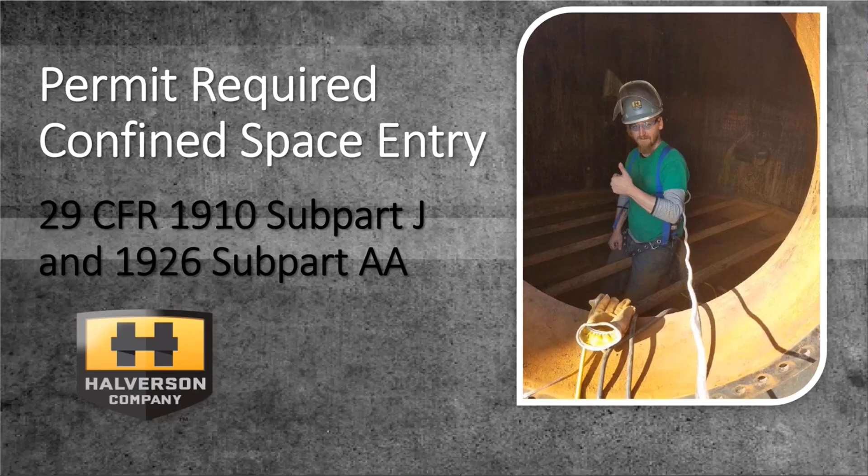As part of our confined space training, we're going to go over what is a confined space, the permit versus the non-permit confined space, hazards and symptoms associated with working in confined spaces, and the workers' roles. There's also a little bit on employers' requirements we might need to touch on. So first of all, let's talk about what is a confined space.

Okay, so here's what a confined space is. It needs to be big enough so you can get your body in it. It needs to have a limited or restricted means for entry or exit. They call it egress. So that means it's not a regular door, it's something that's kind of hard to get into. So like a manhole, that would be restricted means.

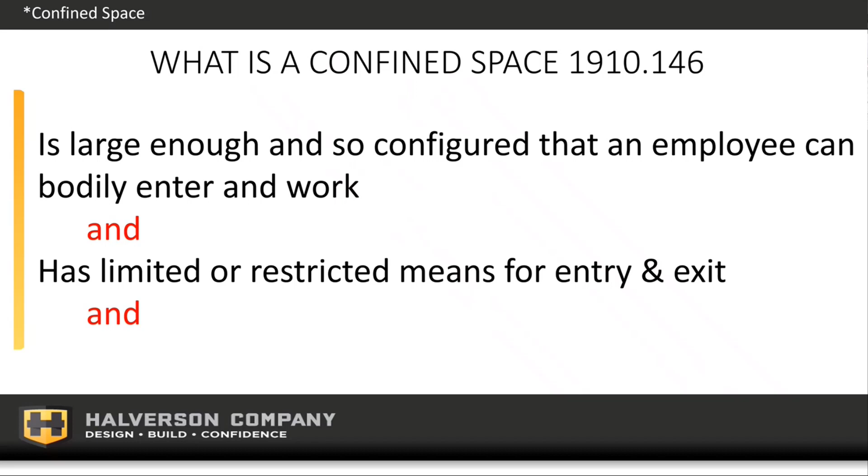If you're getting into your attic, oftentimes you go through a little attic door. You have to get out a step ladder, go up and climb up through into your attic. That would be restricted means for entry. Some of the bins that we go in have pretty big entries on them, so they do not have restricted entry. The other thing that makes a confined space is it's not designed for continuous human occupancy.

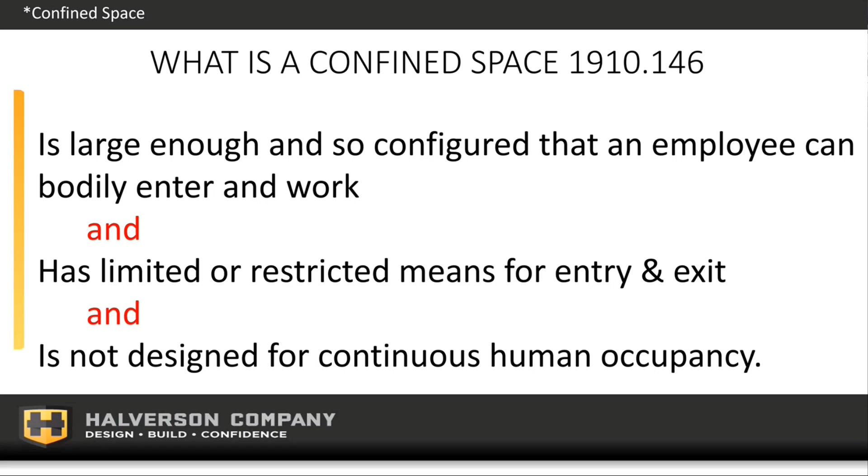That means, is it a place you go to live? Can you live or work in that place normally? So maybe I've got a little cramped office that I work in, and I might think that it's a confined space. So you look at it and say, is it large enough to get into? Yes. Does it have a restricted means for entry and exit? No, there's a regular doorway. Is it designed for continuous human occupancy? Yes, it's meant for you to be in there. So that's the three things that make up a confined space.

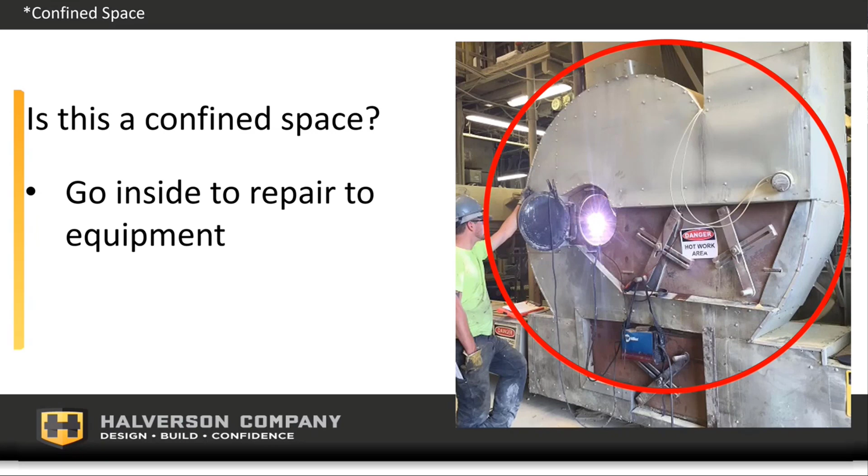So now let's talk about this. Does anybody recognize where this is? Yeah, Balchem. And you know what's going on there? Yeah, they're replacing liners inside. Right. There is actually a guy inside there. You can see the bright light coming out of that little access door. So they're in there welding. We had to go inside to repair it, to put some new lining on it. We're welding metal plates to the existing walls.

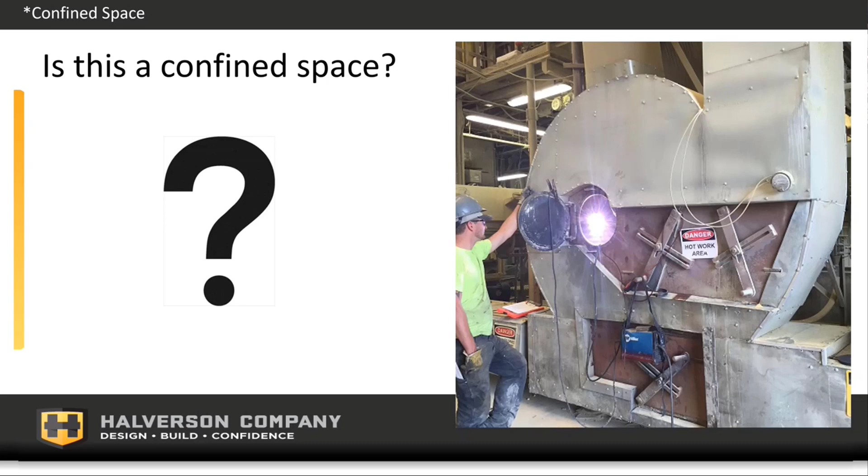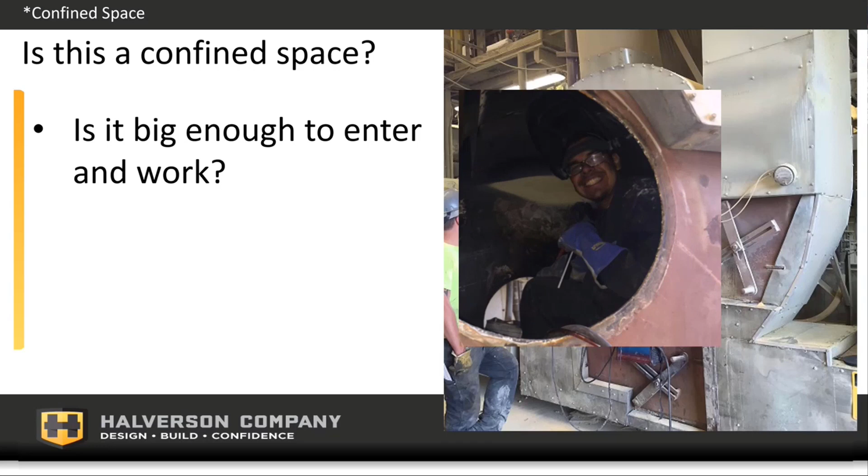So first of all, is that a confined space? What do you think, Miguel? Yeah, definitely. So let's think about our things. Is it big enough to get your body in there? Well, there he is. Just barely. You recognize who that is? That's Angel. So Angel's in there welding that. So yeah, it's big enough to get your body into it.

At least for some of us. I might not be able to get into that. But shut up, Robert.

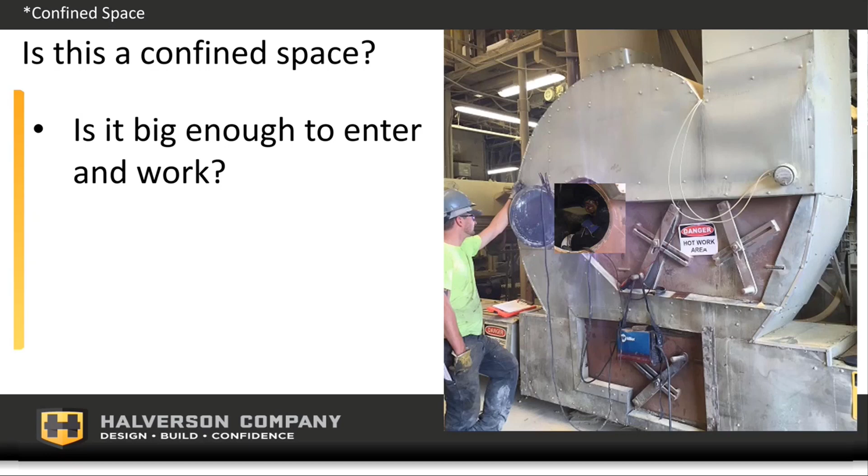Okay, has it got a restricted opening for entry? Yeah, that's not a regular doorway, right? That's not a regular opening. That's pretty restricted to get into. Anytime there's a little hatch like that, yes, it's restricted. Yes, it's a confined space.

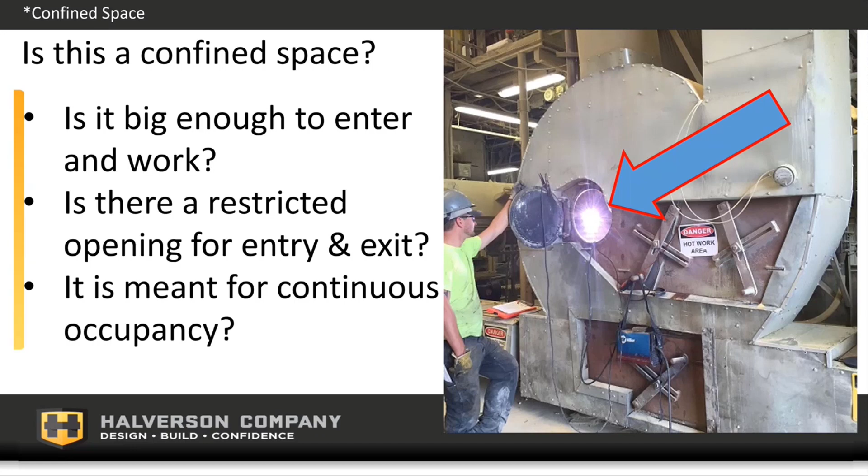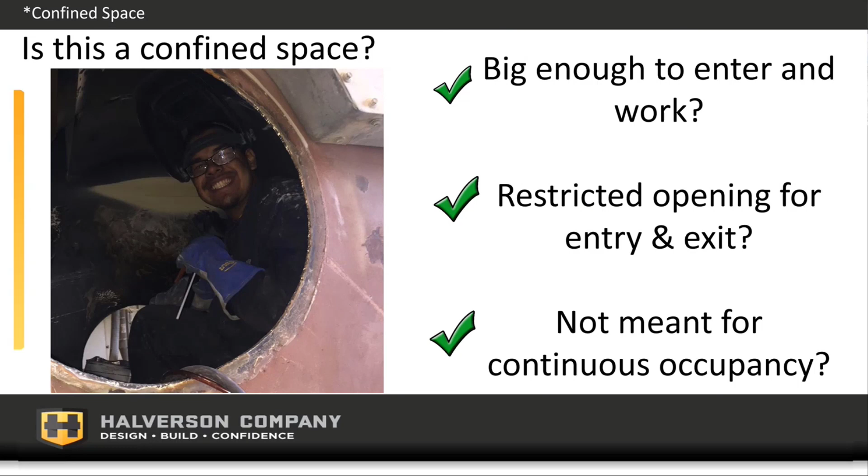And then, are you meant to work in this type of an environment? Is it meant for people to be in there? No, it's not meant for people. It's meant for product. So because it meets all three of those, it's big enough to enter and work, it has a restricted opening, and it's not meant for continuous human occupancy, that's a confined space. Okay. That kind of just really quickly tells you what is a confined space.

How about this, what we've got on the screen right there? Is this hopper a confined space? So let's look at it. Is it big enough to get in? You can see the outline of the man on the left, and you can see, you know, kind of the shadow of him inside. So yeah, obviously you could get a person inside there. Does it have a restricted opening?

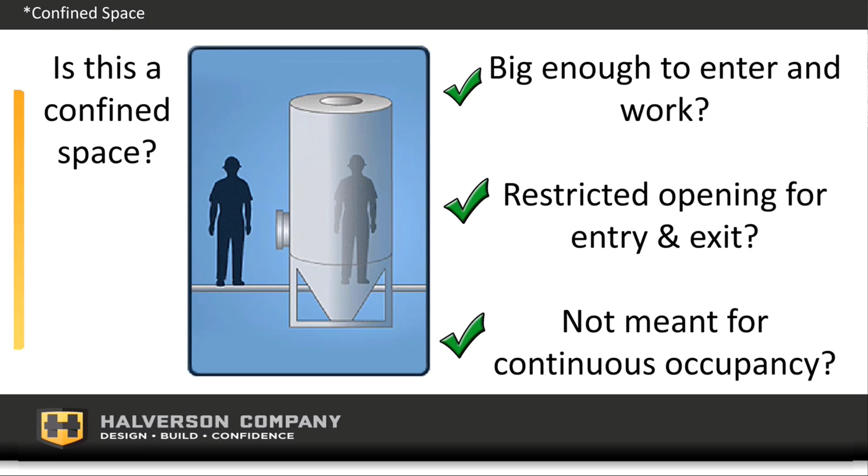You have to get in through that little manhole. That's pretty restricted. Is that meant for people to be in? Or is that meant for product? Product. Yep, just product, right? So it's big enough to get in, has a restricted opening, and it is not meant for people. So, yep, that's a confined space.

Let's do one more really quick. Okay, this is one I use a lot just because I think it helps drive home what a confined space is. This is a crawl space underneath a house. You can get into it, obviously, it's big enough to enter and work. It's not a regular door that you're coming in through, it's a restricted opening. And it's not meant for where you're supposed to live.

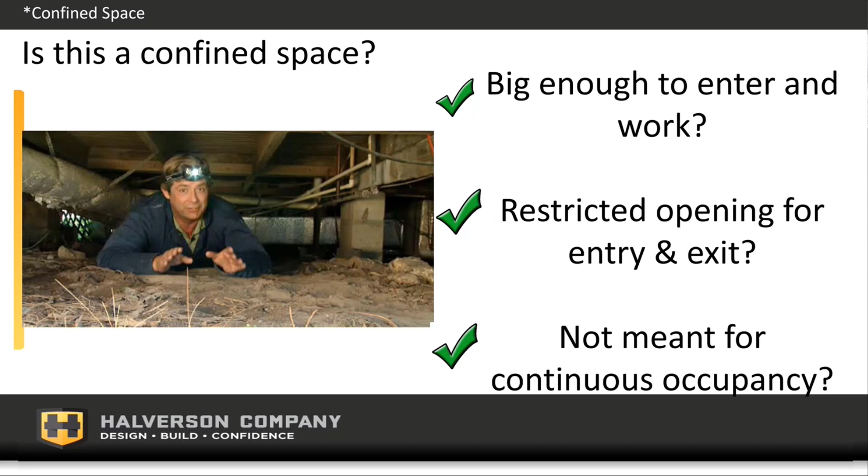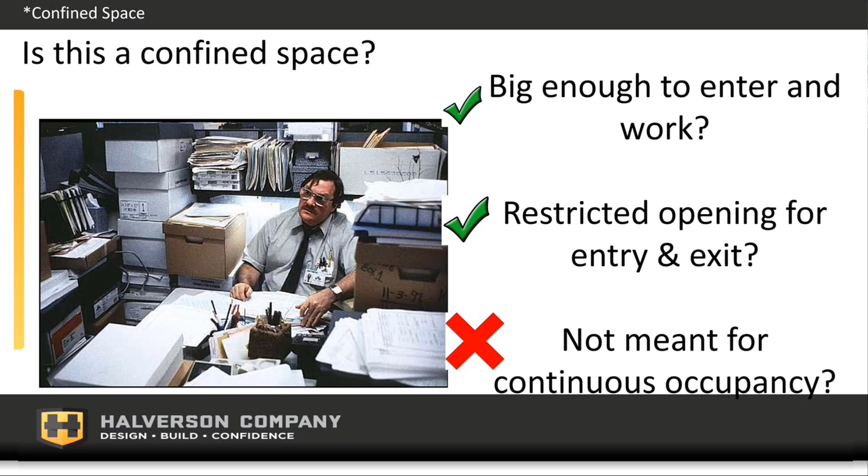That's where you're supposed to have your pipes and things. There aren't supposed to be people in there very often. So your crawl space under your home is probably a confined space. Big enough to enter and work, yes. Restricted opening, kind of, because it's, you know, all choked up with boxes. Meant for human occupancy, it is actually meant for people, so it doesn't meet that criteria.

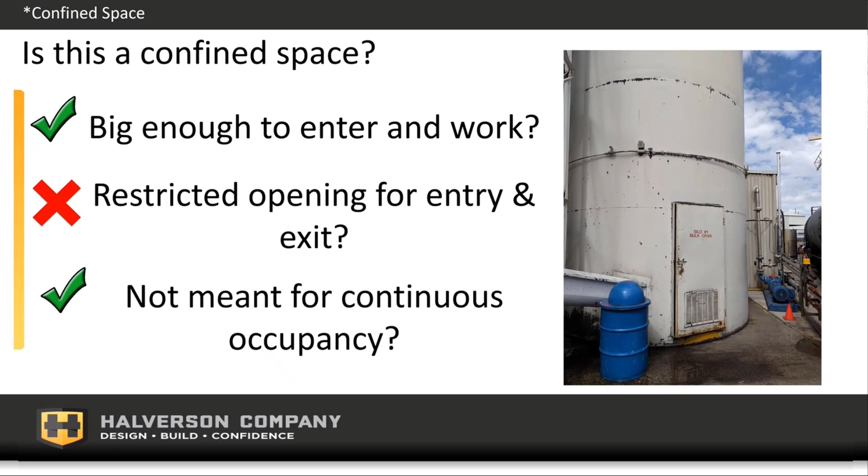Okay, I'm going to kind of slip through this really quick. This one, not a confined space because of the door. It's easy to get in. It's got easy entrance, easy exit, right?

Okay, so now that we know what a confined space is, let's talk really quick about a permit required confined space. So let's talk about your crawl space underneath your house or your attic in your house. It may be a confined space, but there's probably not a lot of inherent hazards with it. If there are hazards that OSHA has identified, and we'll go over those in a second, then at that point, we need to make sure that we get a permit before we go in there.

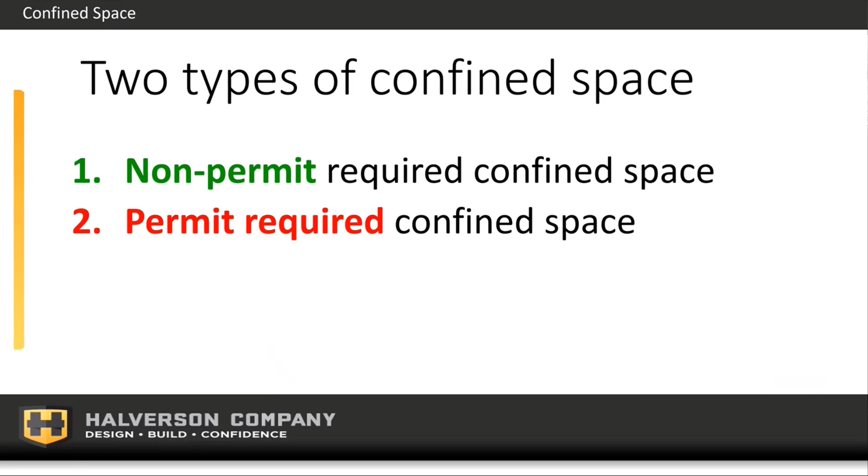So to go into my attic, I'm probably going to be just fine. I don't need a permit to go into my attic. But to go into a hopper on the job site, I'm going to need a permit for that. That's the difference between a confined space and a permit required confined space. So let's talk about that. Different areas that might be confined spaces that need a permit.

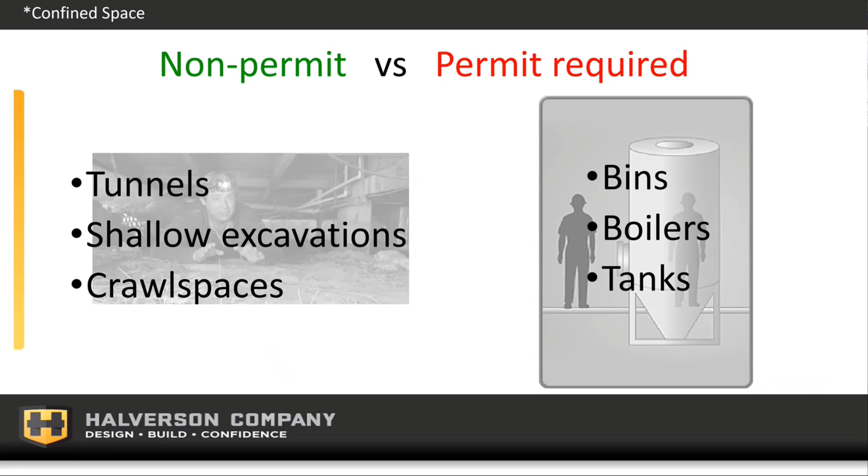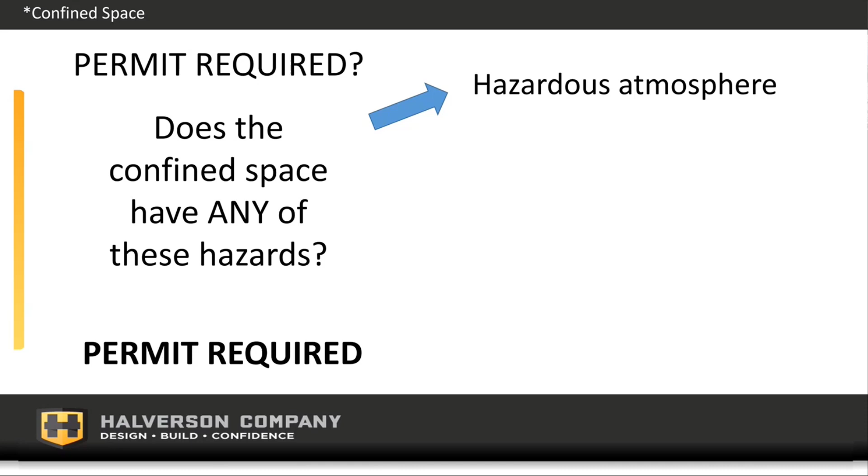So things like tunnels, shallow excavations, crawl spaces, attics, those typically do not need a permit. The ones that typically will need a permit are things like bins, boilers, tanks. So if it is going to need a permit, it's going to meet this criteria here. Any one of these things is going to say, yeah, let's make sure we have a permit for this. So if it has the potential for a hazardous atmosphere, if it has the potential to engulf.

Okay, Robert, what is the potential to engulf? What does that mean? Like a full grain bin. Yeah, you step into a full grain bin on top and you sink into it. Or if you're inside something and it has potential for some product to fall on top of you.

Perfect. Here's another one. Inward converging walls or floors that slope downward. A lot of times we have to go into bins or hoppers and do repair where the floor slopes downward. Automatically, that is a confined space that needs a permit. And then the last one would be any other serious safety hazard.

So let's talk about a hazardous atmosphere. There's a lot of things that we could classify as a hazardous atmosphere, but what we're talking about here is inside a confined space where this hazardous atmosphere is there, and that's the air that we have to breathe.

So I like this photo that I've got here because it just kind of shows that, you know, sometimes we don't think about ventilation as well as we could. Now, if you're inside a confined space, you might not have the ability to do that as easily. The one on the left there talks about oxygen. What's important about oxygen? I mean, obviously that's what we breathe, but how is a confined space affected by oxygen?

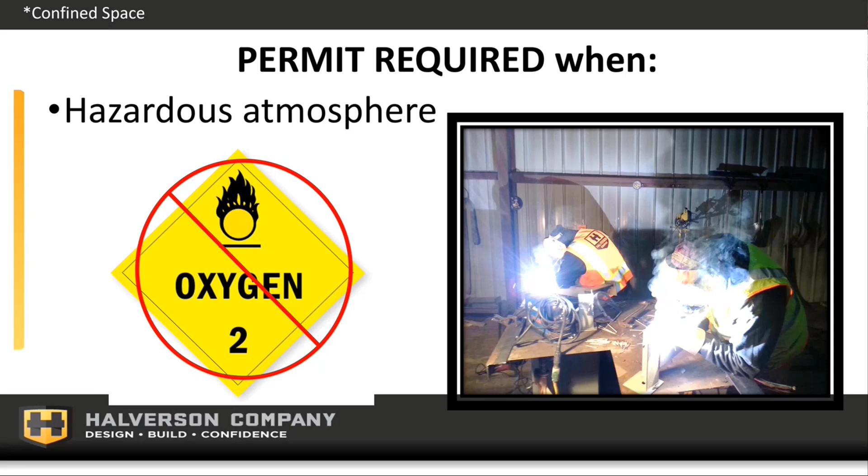Kind of an awkward question, huh? It's the lack of oxygen, I guess, is what I'm trying to say. If you're doing something in that confined space, maybe there's something else in there that's pushing the oxygen out. This is kind of one of the big killers that happens with confined spaces. People end up getting asphyxiated because there's not enough oxygen for them. And typically it's because something else inside that confined space has pushed the oxygen out of there. So there's not enough oxygen to breathe when you get in there.

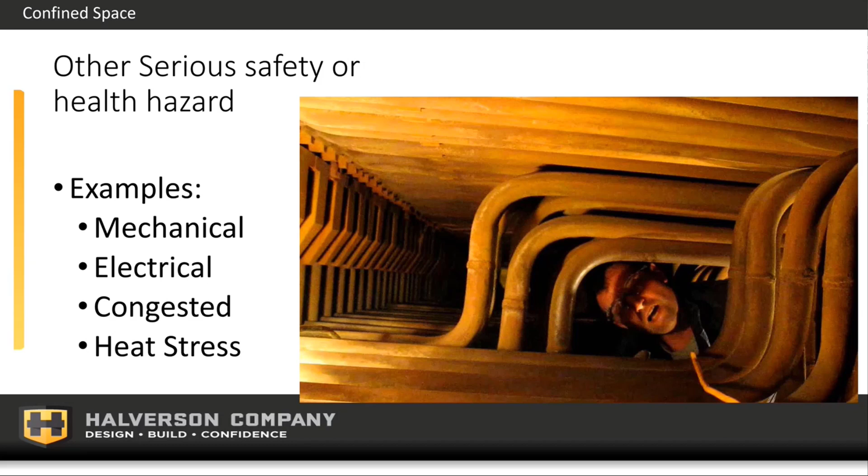Potential to engulf, Robert went over that. Inward converging walls or floor that slopes downward. This is simple, guys. If it looks like that, that's a permit required confined space. And then other serious safety or health hazards. People ask me what that could be. It could be something like this. How would you like to be crawling around in that? That to me is a pretty serious health hazard. Could be things like mechanical, electrical, congested, heat stress.

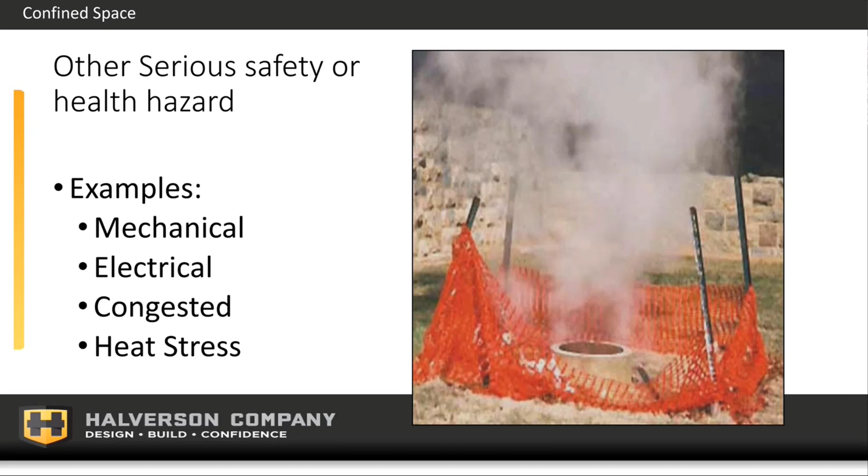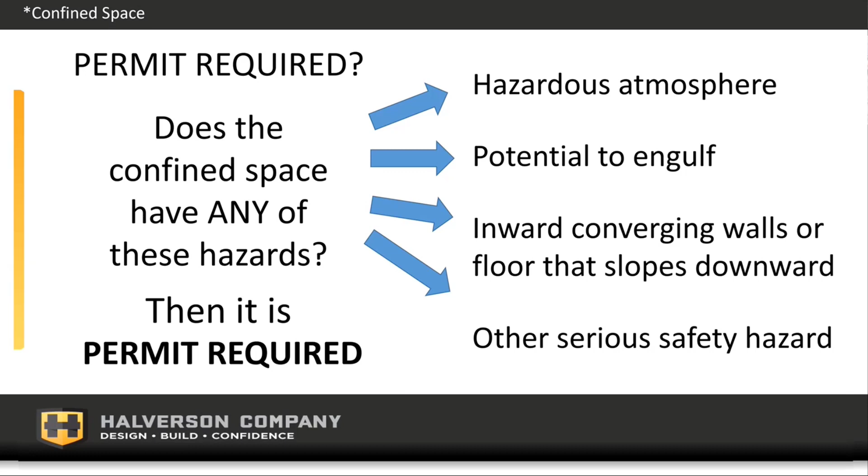Here's an example of heat stress. Look at that stuff coming out of there. I don't want to go down in that confined space. So that one definitely is permit required. I don't like that barricade around that very much either. Okay, so if it's permit required, again, it has to have a hazardous atmosphere or potential for one, potential to engulf, those sloped floors, or another serious safety hazard. Any of those are going to make it permit required. So on our job sites, you're going to run across a lot of permit required confined spaces. First thing you're going to do is get that permit.

Yes. Maybe even silicone. You know, if you're doing a lot of silicone inside a confined space, that can start to get kind of strong too, right? So what do you do in that situation? We use a mask. You can use a mask, respirator. Then remember, that's PPE, and that's definitely an option. Remember, that's always our last option. Try to get a fan in there. Yeah, exactly. Let's get some ventilation. Perfect. Thank you. That's what we did on this one.

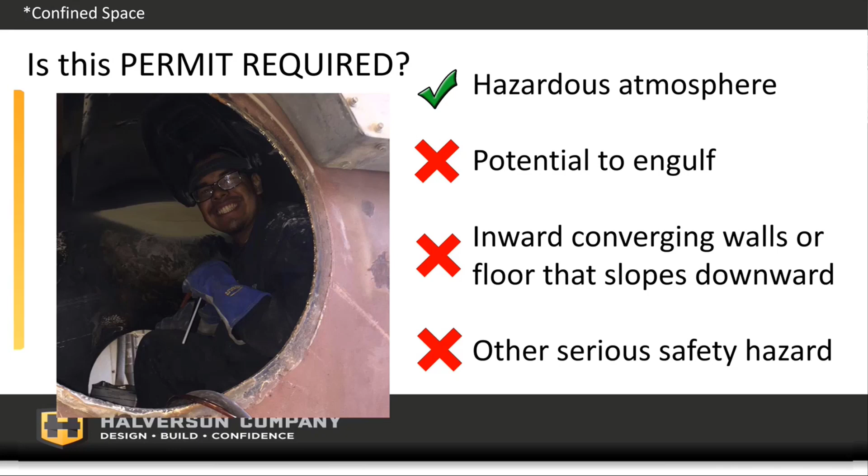There's actually two openings on this piece of machinery. There's one similar to this opening on the other side. And so we put a box fan on that other side, and there was always air continuously blowing through there for Angel. Okay. Was there a potential to engulf? There wasn't. There was no material that could come in from the top, and besides, everything was locked out. It did not have inward converging walls or a floor that slopes downward. What he was sitting on was pretty good. And there was not necessarily another serious safety hazard. But because of that potential for hazardous atmosphere, we still call this a permit required confined space.

Oh man, I had a spider in my bedroom the other day that I swear it was 2 inches big. I was scared to step on it for the mess that it would make.

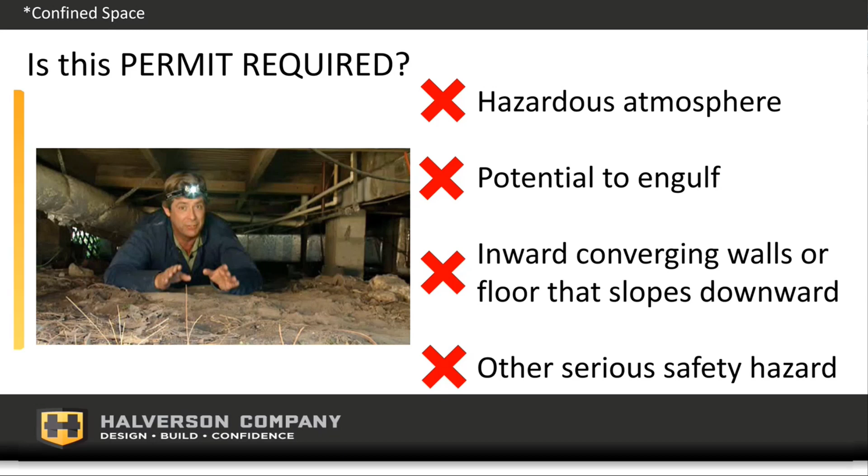Okay, so this confined space is probably not a permit required confined space because it doesn't have any of these potential hazards. So we wouldn't have to pull a permit to go in there. You know, it's good to be aware of what the hazards might be. Like Robert said, you might have some snakes or something in there, so it'd be good to be aware of that. Definitely could bump your head. It'd be good to have a bump cap or something, but it's not required that you fill out a permit.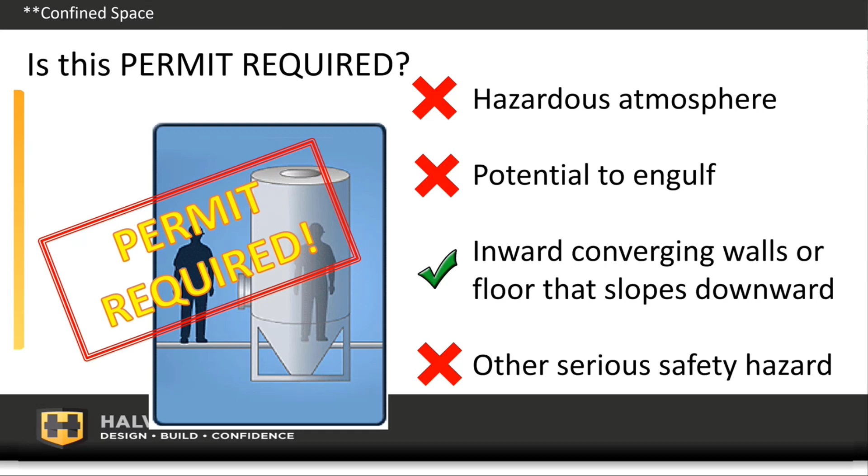So this is a Halverson policy that I wanted to talk about: if we are doing a confined space entry, our Halverson policy is that we need 3 Halverson employees. Why don't we use one of the employees from the facility and 2 of our guys? Why do we try to have 3 of our own guys? Training, right? Yeah, thank you, Frank. That's perfect. That's exactly right.

So for one thing, we're trained in construction. A lot of the facilities we go to, they're not trained in construction. There are a few different rules for construction than for general industry. And the other one is we don't know what trainings they've had. Do you know if the guy from the facility is trained to be an entrant? What roles can he do? And what kind of training did he have? Do you feel comfortable with that? So because of that, we just try to, whenever possible, have 3 Halverson employees when we're doing a confined space entry.

Now, that means, again, for estimators, you need to be aware that you're going to have to send 3 guys to a job that might only need 2. Well, if you're doing confined space entry, we need to send 1 more. Okay, that also means for foremen, supervisors, make sure you're thinking ahead so that you know what day you're planning on doing this and that you have sufficient crew there to take care of it.

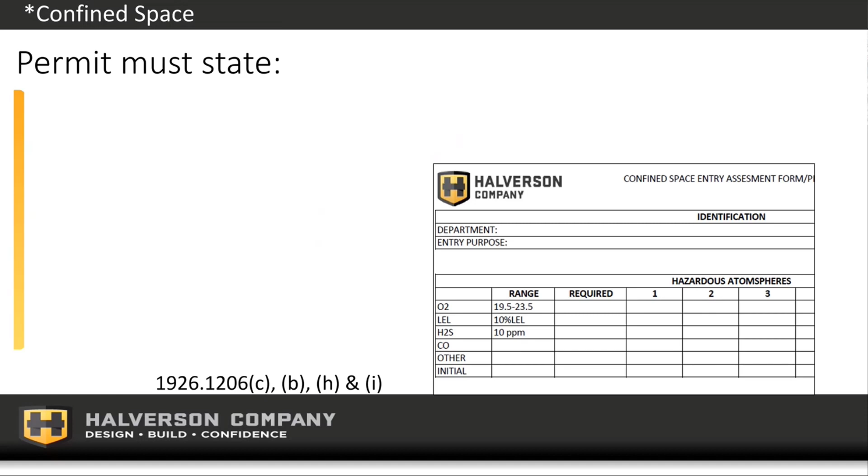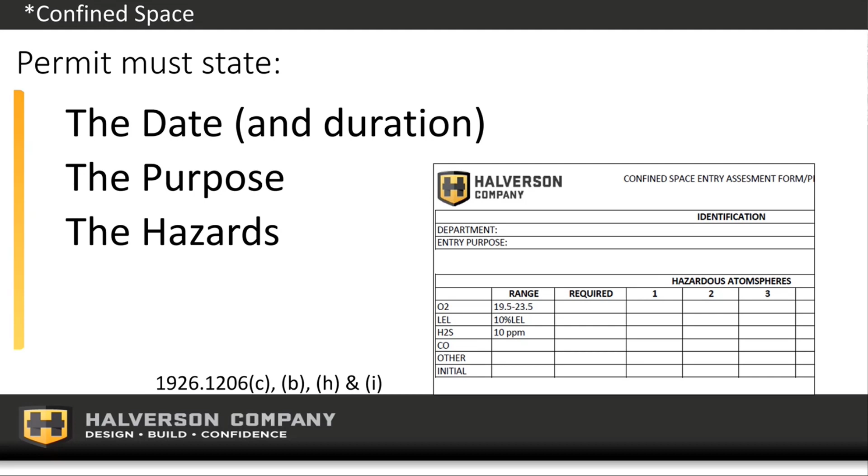Okay, fill out your permits. Your permits need to have certain things on them. They need to have the date. We try to determine what the duration is of our entry, the reason we're going in, where we're going in, what the hazards are that are going to be there. We want to identify the roles and duties. What that means is who's going to be the attendant, who's going to be the hole watch. The attendant sometimes is called the hole watch. Who's going to be the entrants, the people going in and doing the work, and who's going to be the supervisor. So we need to have that all written down on the permit.

And this is important to know. Let's say that Tristan is an attendant on a job and he needs to take off and go do something. Can he just go to Dan Lee and say, hey, Dan Lee, take over as attendant for me? Now, if Dan Lee's name is on the permit also as an attendant, then he might do that, right? As long as they're both authorized attendants, then they can swap for each other. But if their names aren't both on there, then they can't. So that's what an authorized attendant means, is that your name is on the form as one of the people who is an attendant. Okay, so let's talk about that roles and duties.

So we got a job where we're going to list on the permit attendants Frank, Larry, and Rayford. We're going to list the entrants as Frank and Larry, and we're going to list the supervisor as Rayford. Now, we only need one person in the hole at a time. So do we need two entrants? Are Frank and Larry both going to be entrants? Or are they both going to be attendants? Or how does this work? How come I've got them all listed there? How can I have Frank, Larry, and Rayford be an attendant and Frank and Larry also be an entrant?

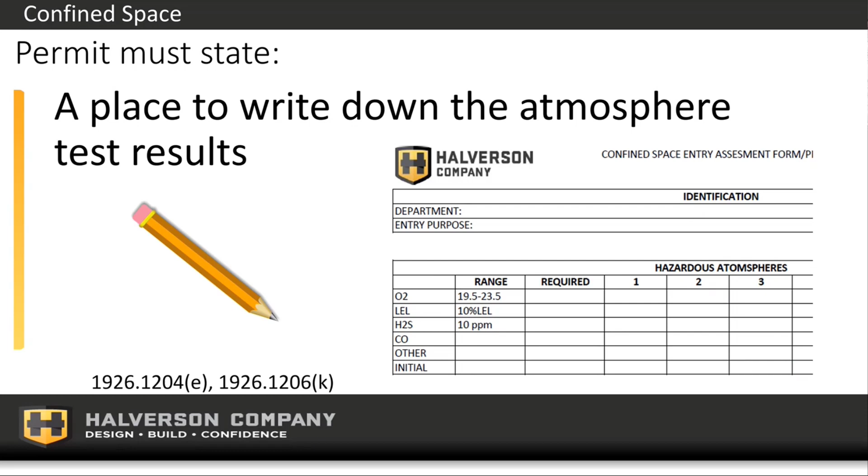Okay, on the permit, speaking of atmospheres, we're going to write down the atmosphere, what it is. We're going to make sure we check it before we go in there. We want to make sure that we're looking for at least 19.5% oxygen. That's the main one, the low end there. This is right from the OSHA regulations, stating your oxygen level has to be between 19.5 and 23.5. Where the biggest problem comes in, though, is if you get below 19.5. You start getting some symptoms that we might go over here in a second.

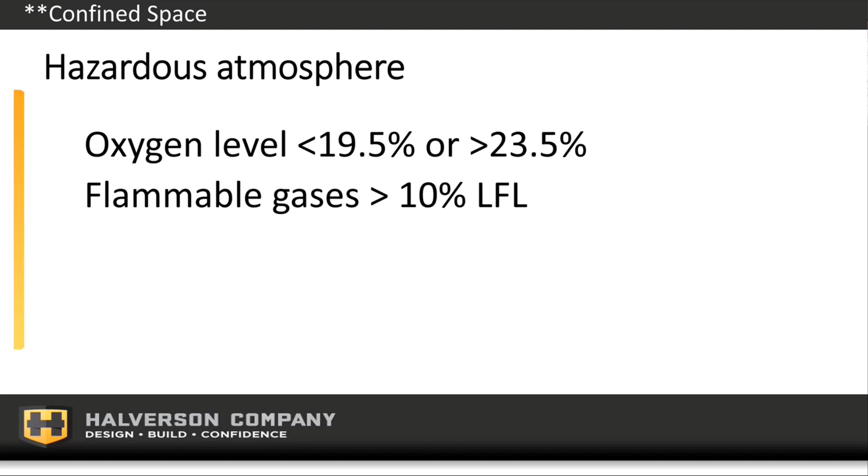Okay, we also want to look for flammable gases. So we're going to check the oxygen. We're going to check for flammable gases in the area. We're going to check for carbon monoxide in the area. That's the silent killer. We don't know about carbon monoxide. We don't smell it.

We don't see it. If it's in the area and if it's in greater than 25 parts per million concentrations, that can be deadly for us. So we need to check that. And we might be checking for other toxic gases, depending on what the facility says has been stored in that particular confined space. So how are we going to do that?

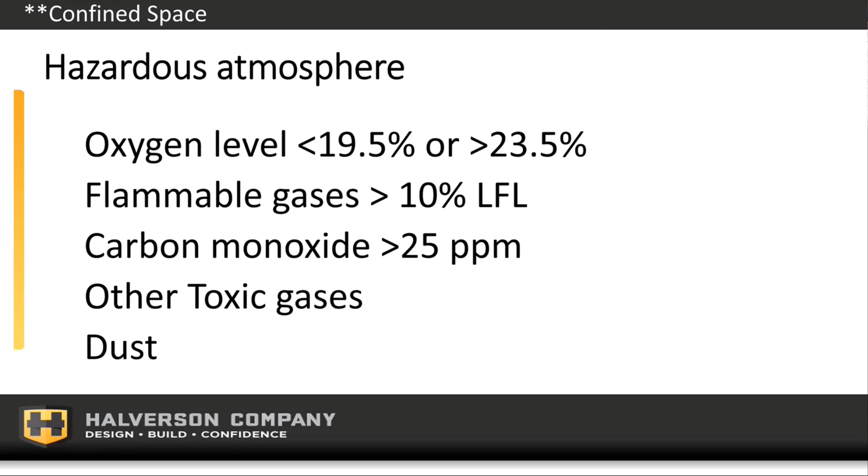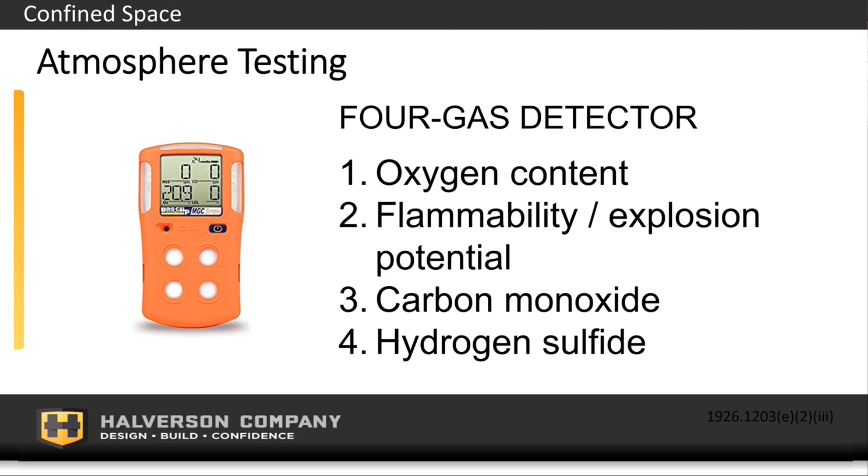Yeah, get that monitor, right? We're going to take a monitor, gas detector, an air checker. We're going to check for oxygen content. We're going to check for flammability, explosion potential. We'll check for that carbon monoxide. And one of the most dangerous gases that we'll check for is hydrogen sulfide.

Hey, Larry, real quick. One of the things you brought up was dust, and I think it's an interesting thing to talk about because my understanding is the gas testers aren't going to test for dust. But if we're in a bin and we need ventilation in order to blow air in there, we don't want to create a dust cloud within a confined space, because that could create an explosion hazard. Especially if we're welding or cutting, which is highly likely. So, any additional thoughts or counsel related to dust?

Yeah, that's a great point. That is one of the ones on my slide there, and I kind of just skipped over it quick, but we should discuss it a little better because, like Steve said, our gas detector, our atmosphere checker, is not going to test for dust. So what's the rule of thumb? Does anybody know what the rule of thumb is for dust? How much dust is too much dust?

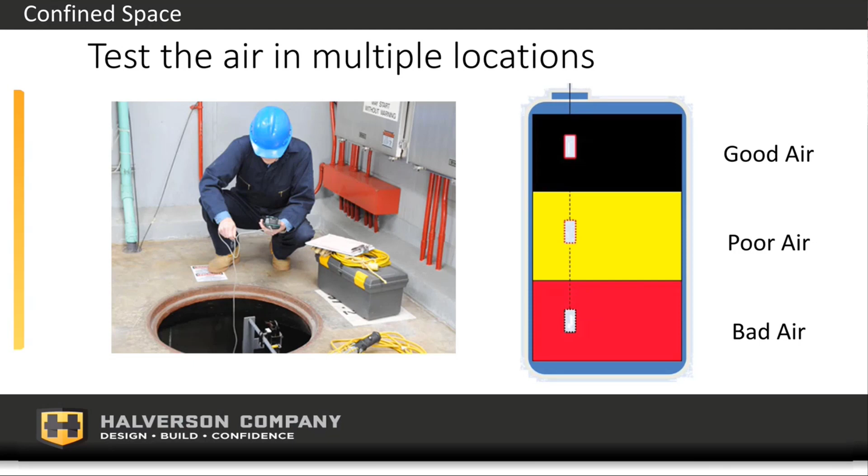Okay, so test the air prior to entry. Let's test it 20 minutes before we go in. Test it in several locations. If you just test it up close, like this guy's going to do a vertical entry, if he just tests the air up at the top, he might not know that the air down lower is bad. So test it in several locations, and then before you go in, you're going to test it again. So we want to test it, and then we want to check it again.

Why do you think we want to check it? Yeah, 20 minutes. That's good. That's a good time. 20 minutes, half hour. We do it apart. But why do we do that? Why do we check it twice? Conditions could change. Yeah, we want to see if something's happening. Maybe the oxygen's going down. Maybe it's getting less, and then we want to know why, right? Double check it.

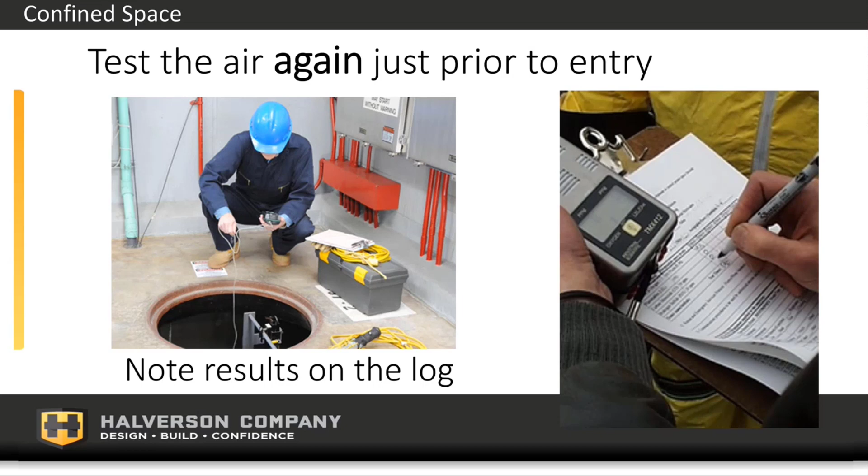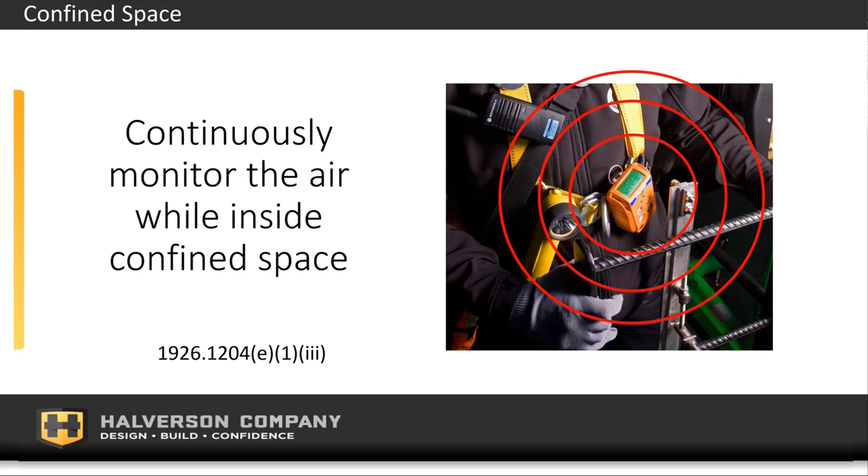Very good. Okay, something that is required for us in the construction industry is you have to have that monitor on you 100% of the time when you're inside the confined space. So it used to be that we could just check it every few minutes. Now you actually have to have it on you so that it will alarm. They have an alarm on them. That alarm could go off while you're in there. And so it's good to have it with you the whole time that you're in there. We do not own our own atmosphere monitors.

Keep that in mind. You need to set up... Larry, I got a question for you. Yes. Hey, if we're inside of a flat bottom grain bin, and you have the manhole, which makes it permit required, what if you have a couple of sheets off the side of it removed? Is that permit required or not permit required? In most cases, we've been able to reclassify those as non-permit required while the sheets have been removed.

Is there a size of hole that makes it non-permit? Not necessarily, no. It's what we're looking for there more than probably the size of entry. I mean, we want to have an easy way to get in and out. So if I'm having to crawl through a hole to get in and out, it takes some time to get in and out of there. If you've got it big enough that I can just kind of get in and out easily, maybe bend over and walk in or walk out, that's not too big a deal.

If I have to get on a ladder, climb up to an opening to get in, and then the same thing to get out, then that's kind of a hazard right there. But if I can get in and out fairly easy, that's what we'd be looking for there. But more than that, what I like about it is when you're opening up a larger opening like that, you're allowing for more air movement.

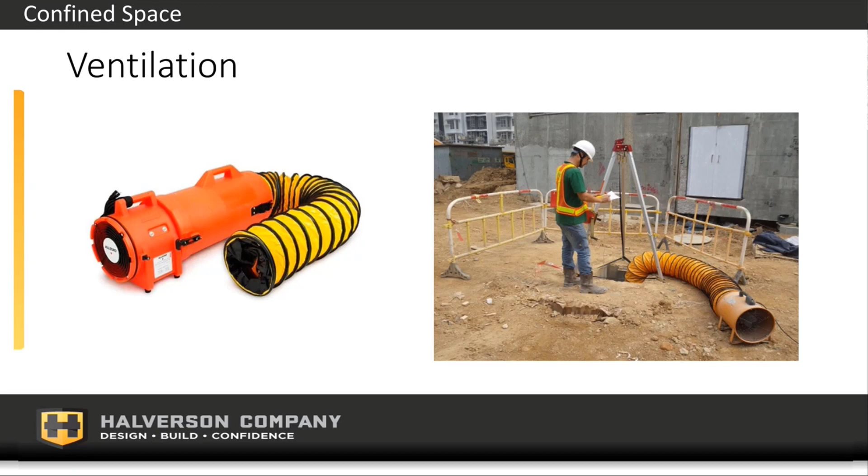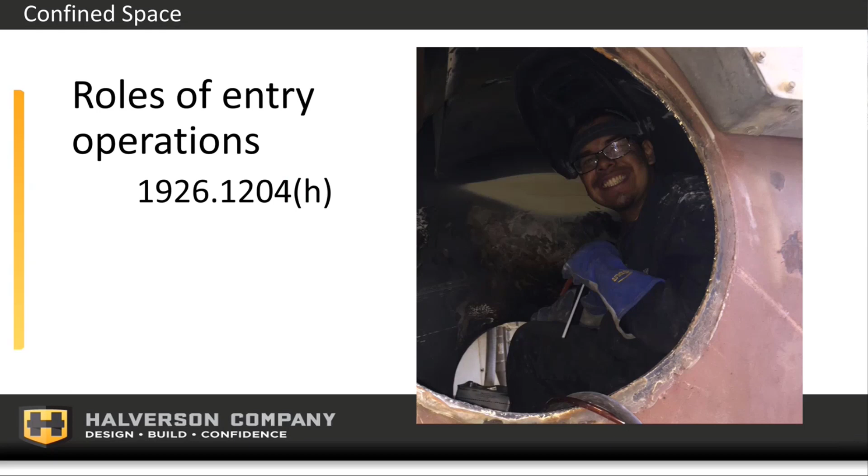Okay, I'm going to go over roles of entry really quick. We talked about the three things: the person standing outside at the hole watch, the person who's inside, and then the person who's doing the permits. So we got the entrant, the attendant, and the supervisor. The entrant is the person inside. He must be aware and be able to identify the hazards.

So let me ask you this. Everybody involved in this needs to know what the hazards are. That's going to be a part of every role. How do we do that? How do we know that everybody knows what the hazards are? Yeah, you talk about it. Exactly. Thank you. So have yourselves a little meeting before you're doing your confined space. Get together and say, okay, here's the confined space, here's the potential hazards. And go over them together and come up with your plan together. Make sure everybody knows the hazards and the plan.

Okay, the entrant has to be able to communicate with the attendant. And he has to do that quite often. So if Frank's inside the hole and I'm the attendant, he's going to get tired of me asking, but every few minutes I'm going to say, how's it going, Frank? He's going to say, leave me alone. And then a few minutes later, I'm going to say, Frank, and he's going to say, what? I'm going to say, what's going on in there, Frank? He's going to say, I'm just working, leave me alone. But why is that important that I keep that communication going? Checking up on him, right?

Now, what if Frank isn't responding to me, or Frank's in the hole and I say, how's it going, Frank? And he just kind of mumbles something. Something could be wrong, right? There could be a problem. So that's why that communication is important. And that's what the entrant and the attendant need to have going on. Okay, wear appropriate PPE and make sure you know how to get out of the space.

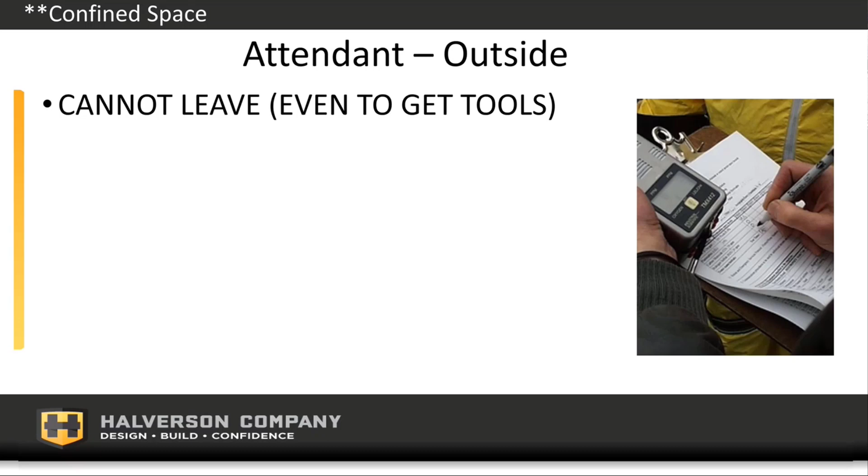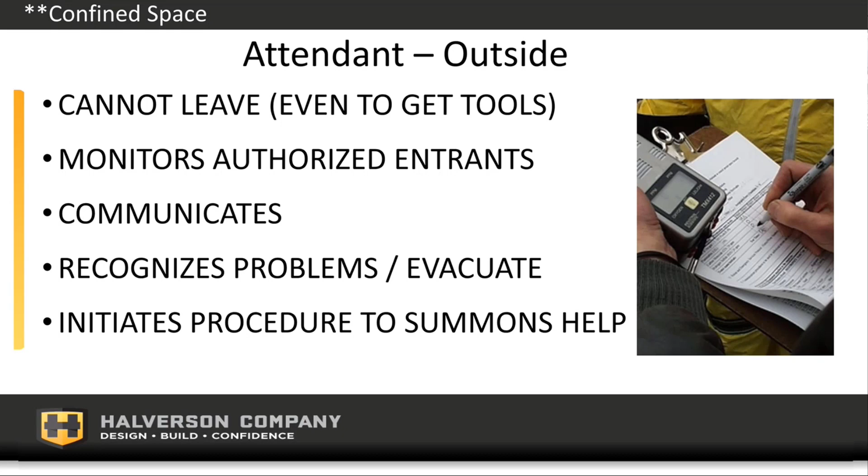Okay, the attendant's going to monitor anybody who's in there, making sure they're okay, keeping that communication going. If he recognizes there's any problems, he says get out. Now, if I'm in the hole and Tristan's outside and he says, Larry, it's an emergency, get out of there now, I don't go, well, what's the emergency? Why do I have to get out? I'm right in the middle of this. I have to do what the attendant says. Tristan says get out, I have to drop everything, make sure it's safe and get out. And the attendant is the guy who's going to initiate the procedure to summon help if we need it.

Supervisors, they need to also know the hazards of the confined space. The construction standard says that the supervisor has to personally inspect the space. So this means that I can't sit over in the trailer and never go and look at the confined space and say, okay, guys, go over and go to this confined space. I understand it's over here in this area, and I heard that here's the hazards you need to be aware of. Okay, I can't do that. I would need to go over and look at it, see the hazards myself.

The supervisor also has to be on site at the construction during the entry. So he doesn't have to be there at the hole. He doesn't have to be an attendant. He doesn't have to be an entrant, but he has to be on site. That's by OSHA.

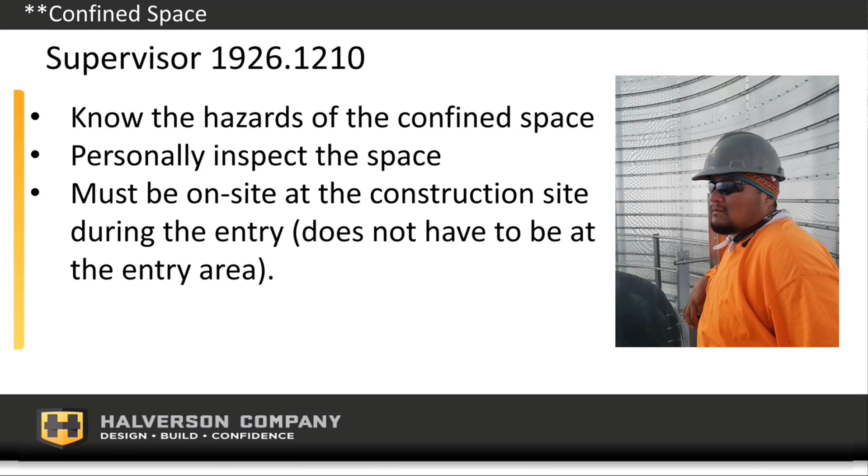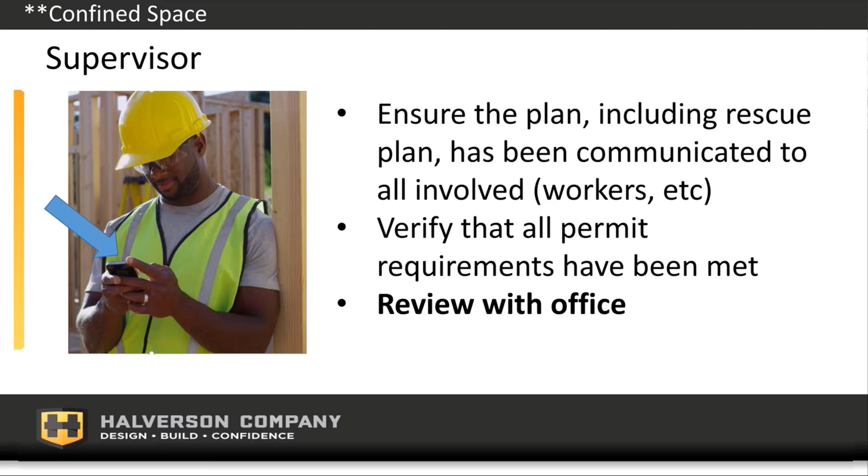He's going to ensure the plan, including a rescue plan, has been communicated to all workers, verify that the permit's been filled out correctly, and then this last one is important. He's going to review that with the office. That is a Halverson policy that we review with the office before we go into the confined space. So we get it all ready to go. We've had our little meeting. Everybody's aware of what the hazards are. Everybody's aware of the plan.

Before we make that entry though, let's call up Rick or call up Larry Hatch and do a little review. Let's just make sure that we've thought about everything we need to. That puts one more pair of eyes, as it were, on this situation. It also lets us all know who's doing what and in what positions there are. So we can go over it and say, okay, have we done this, have we done this, have we done this? And then also so that we know who's in a dangerous situation and how to get them out of there.

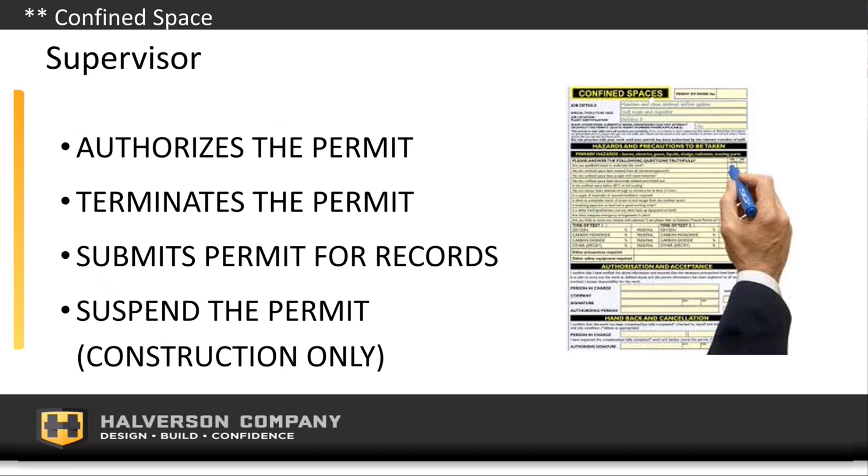Okay, supervisors can authorize the permit, terminate the permit, submit them for records. Just so that you're aware, as the employer, we have to maintain these records, keep them on file, review them. Supervisor can suspend the permit and reinstate it. Evacuate the space. I was going to talk about this really quick. If oxygen levels are low, the symptoms you're looking for there with the guys: shortness of breath, confusion, lips turn blue, maybe your fingernails also could turn blue, and you're seeing spots. Obviously, fainting is going to be the worst one of those potential symptoms, and we don't want to ever get to that.

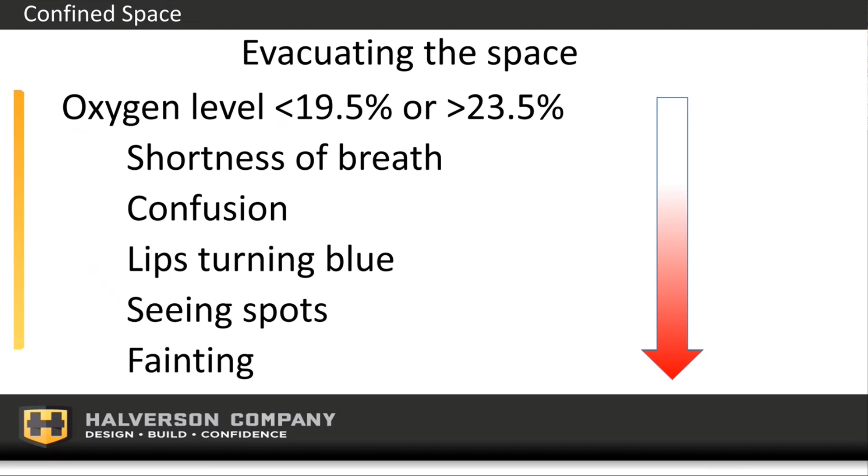Okay, I mentioned that if you're going into a vertical entry that you may have to have some help getting the guy out. This is the help you have to have: a tripod. Okay, this is a mechanical means. OSHA requires that anytime you let a person go into a permit required confined space where they're having to be lowered into it more than 5 feet deep, so again, this is going down from the top and it's more than 5 feet deep, you must have a tripod. You must have a mechanical means to pull that guy out. So here we've got one entrant, we've got one attendant. That one attendant can get that guy out of the hole because he's got the right means to do so, because he's got that tripod.

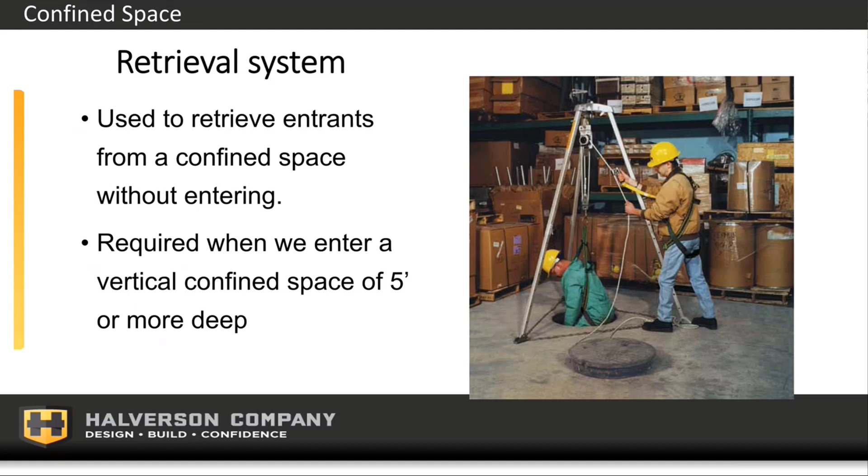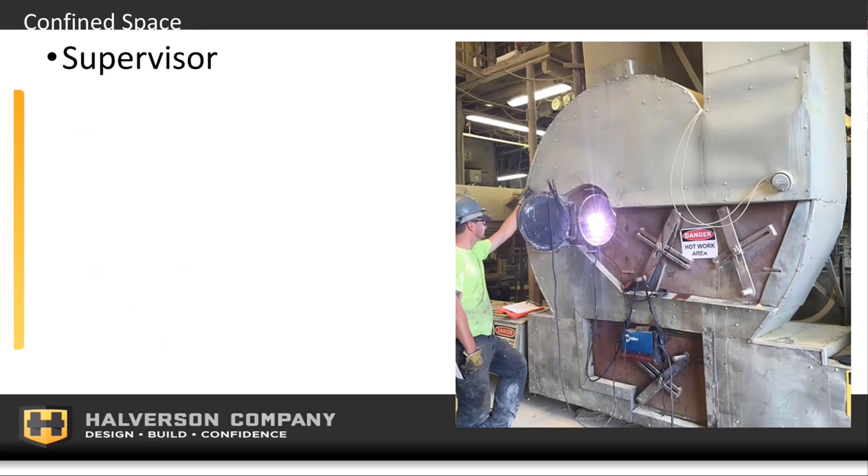Okay, the supervisor. I just wanted to point this one out here because all the photos that I've taken of this area don't really show the supervisor. Mike Isaacson was the supervisor on this job. He was actually around the corner doing some work on something else. The supervisor's not the attendant. He does not have to be in the immediate area, but he does have to be on site.

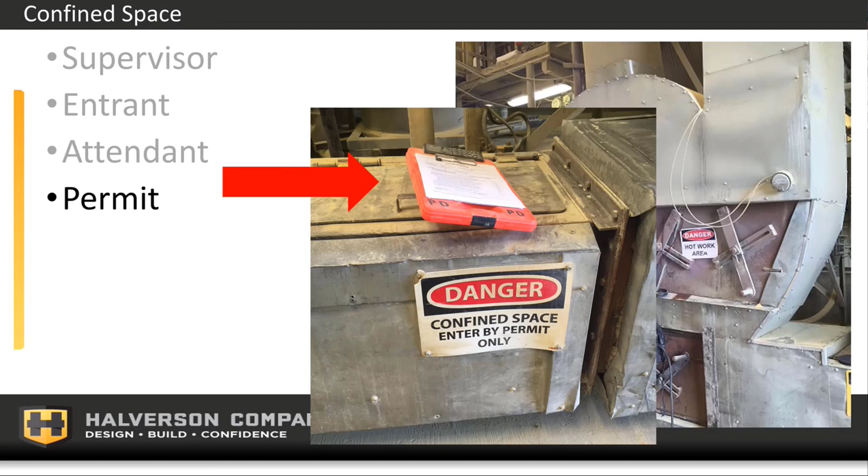Okay, just pointing out also on this job, they had a supervisor, they had an entrant, an attendant, they had a permit right there. They posted that it was a confined space. So this was a good confined space. These guys did a good job on this one.

Okay, employers have to have a written program. We have to evaluate it. Training is required before entry and periodic training. This is why we go over this every year, guys. I know sometimes it gets old, but it's important that we do it. And we had some good discussions today, so I appreciate that from everyone. We keep our permits for a year, our training records as long as the employee's with the company. We evaluate the program from time to time.

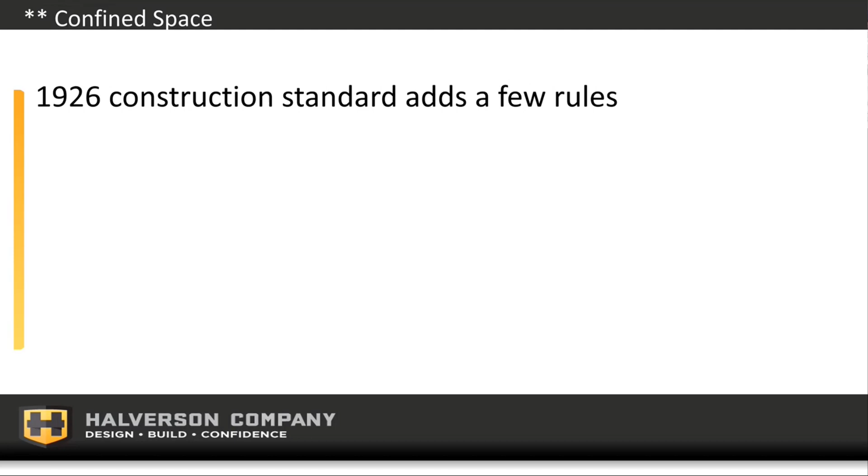A few other rules. 1926 states that if we're on a job site where they have never determined where their permit required confined spaces are, we have to provide a competent person from our crew to go through and determine if there's any permit required confined spaces we need to be aware of. The construction standard requires that the facilities we go to identify the confined spaces, that they have a written program, that they share with us where their permit required confined spaces are, and what the hazards that they know of are associated with them.

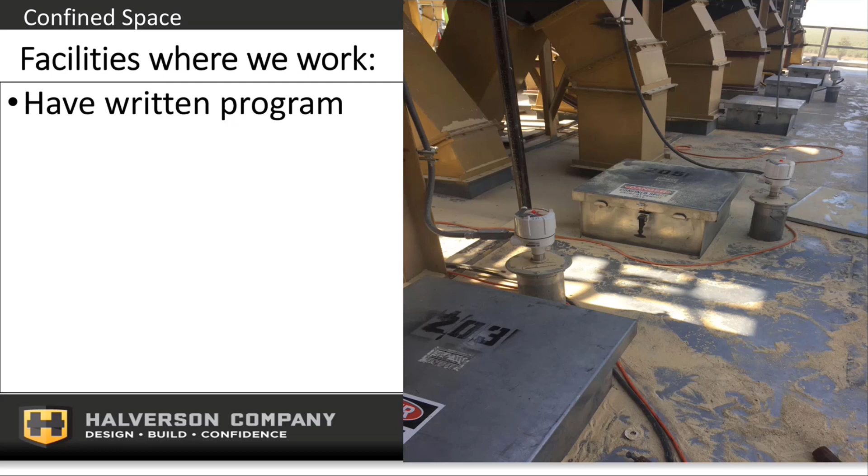Yeah, Robert. So Larry, on that note, highly recommended we notify the local fire department and let them know that we are doing a confined space, so that if there is an issue or emergency, they will be aware of it.

Yeah, definitely. So we talked a little bit about how, you know, if something happens, we don't want to have to go in after anybody to get them out. We want to try to be able to get them out by doing non-entry methods. So maybe we have a lifeline attached to them that we can pull them out. Maybe we use the bosun chair and drop them down from the top in, and we can get them out with that bosun chair.

But if something happens where we can't get them out, remember it's really dangerous. Maybe the atmosphere was bad and we don't want to go in after them. We have the fire department go in and get them using their SCBA equipment, right? They're trained for it. They have SCBA gear so that they can go in and get into situations like that without killing themselves in the process.

So, like Robert's saying, that needs to be part of your emergency plan. How are we getting these guys out of here? Well, our non-entry technique is we're going to pull them out. We're going to tie a rope around the guy's neck and pull him out. No, don't tie it around his neck. Tie it to his harness, right? Have him wear his harness. Tie a rope to him and pull him out that way if you can.

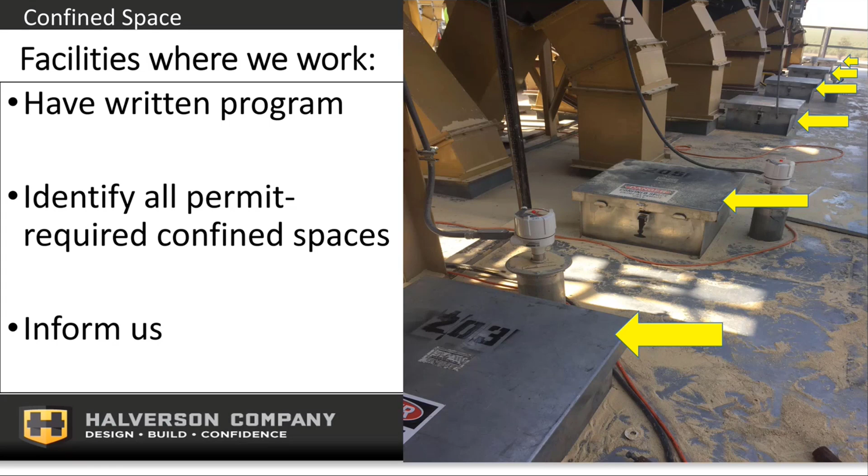Okay, we've gone over today what's a confined space, permit versus non-permit, the hazards and symptoms associated with some of the hazards in there, the different roles of the workers, and some of the employer's requirements. Are there any questions about confined spaces or any other comments?

Hey, Larry, just one comment, and we just barely talked about it, and I appreciate Robert emphasizing this on the rescue stuff and getting with fire departments and facilities. I mean, this should be a team effort. We should be coordinating it with facilities as much as possible as well. And they may have their own rescue procedures that we should try and tap into and just make sure that we're aware of everything and they're aware of everything. Because, as Larry's talking about, this could be life or death for someone. So we need to take it very seriously.

And one of the things that Rick likes to say, since we're quoting Rick a lot here, is he likes to think of what's the worst thing that could happen. If someone faints or passes out inside a confined space, that's not the time to be thinking through how we get them out. We have to have a reliable way to get them out, and we need to know how to do it. And even if someone does get out, we still may need those emergency responders to help with first aid or CPR or anything that may have happened. So just be aware that the time to do that is before.